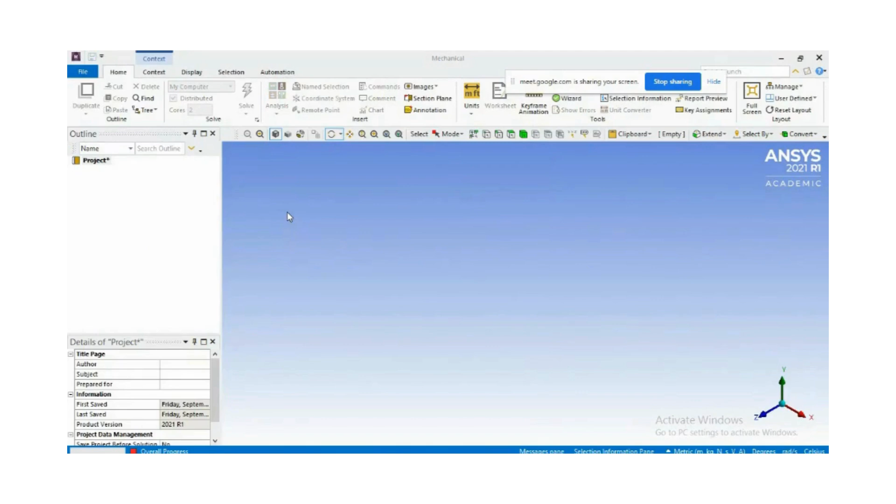Then right click on model, edit. So it will open the DesignModeler, and whatever geometry you have imported, suppose it is in the form of a connecting rod.

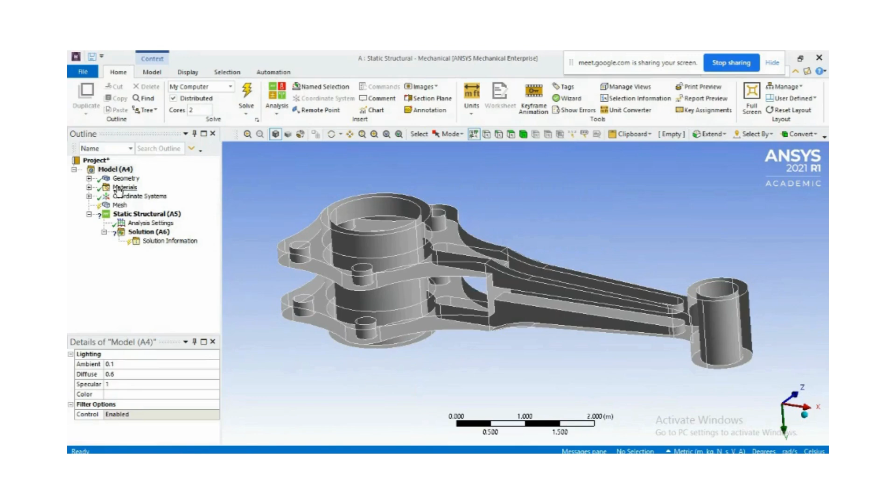We have units here, metric units by default. Suppose you want to change, you can change to centimeter, meter, mm, whatever. Material is structural steel, and you can observe all the properties required for structural steel shown here.

Now meshing is under process, it is incomplete, and for the static structural analysis it is showing a question mark, so it is incomplete. As we move further, we complete each step one by one in this project outline.

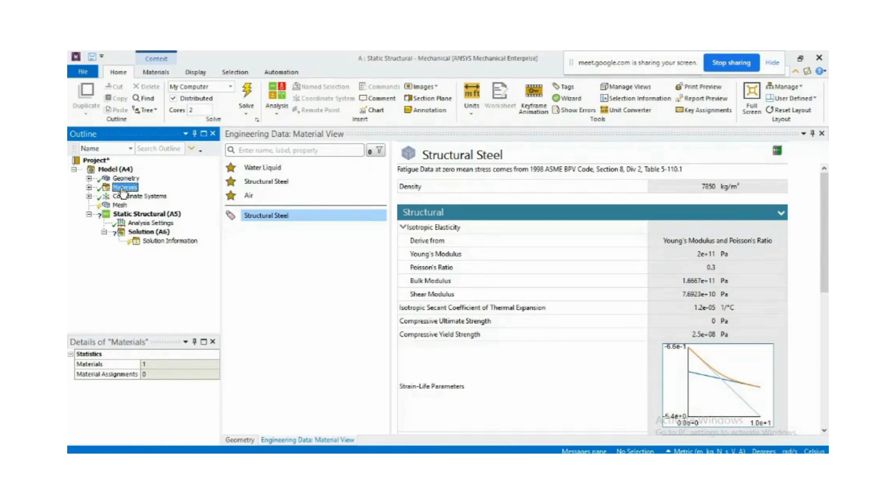Already we have imported the geometry and considered the material. Already here we are considering the coordinate system, x, y, z. That is required to know when you are applying the load, in which direction the force is being applied.

Meshing: you can define the element size based on the dimensions of your component. So I know the component, that's why I am defining 0.15 meter as the element size.

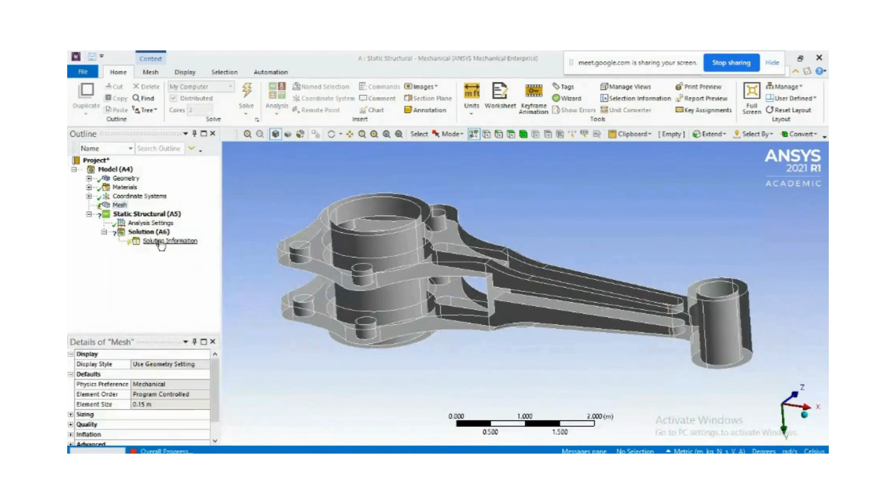Then once you define it, right click on meshing, generate mesh. Once the mesh is generating, it shows completed with a green check mark. Under statistics, you observe the number of nodes and elements created. This is a 3D element which is tetrahedron in nature.

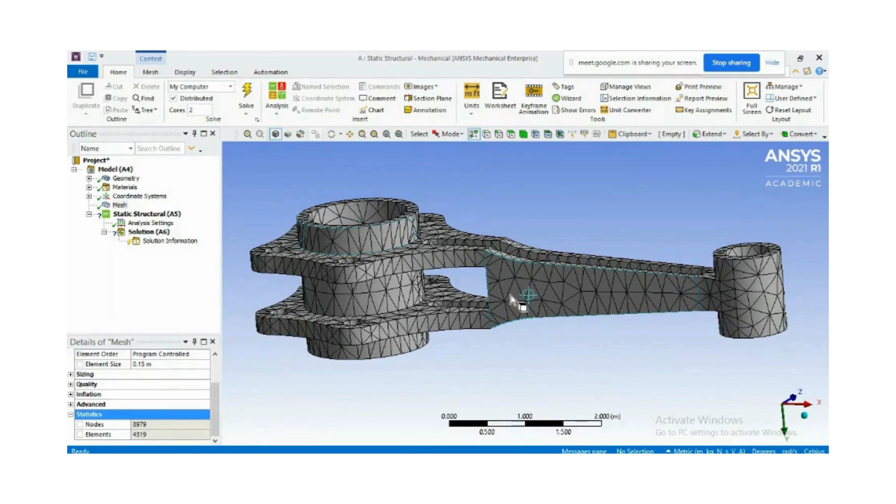In case of a beam with a regular cross section, as we performed, you get a cubic element, or the element is in the form of a brick, similar to a cube. Here all the elements are in the form of tetrahedron. You know the element types: 1D, 2D, 3D. Under 3D, you have tetrahedron as the element type.

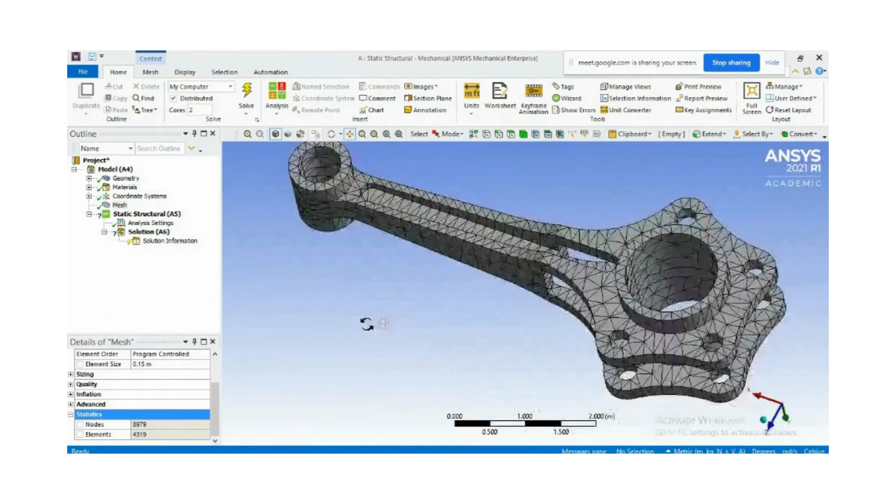Tetrahedron as the element type. It is having 4 corners and 4 faces. That is a tetrahedron.

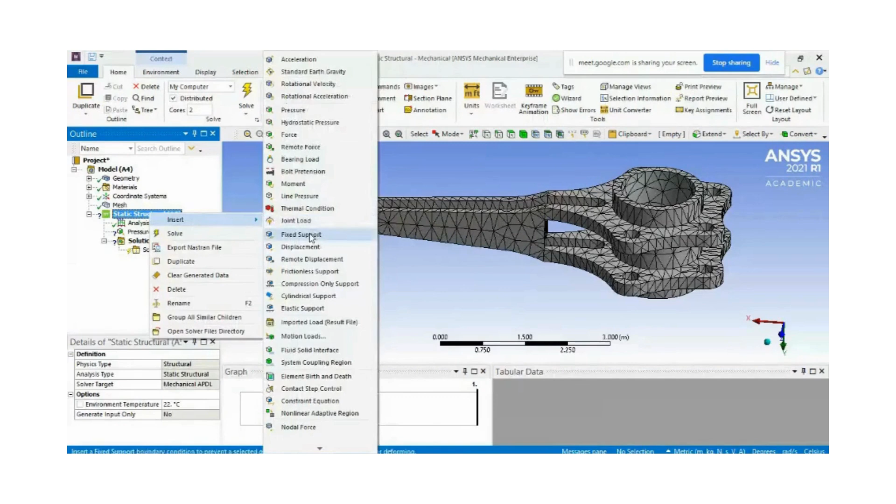Now under the static structural analysis, right click on insert. I require to apply, suppose, pressure, and I also require to constrain the model, so I require fixed support. Then I will apply first pressure on an edge or face, so I will select that face.

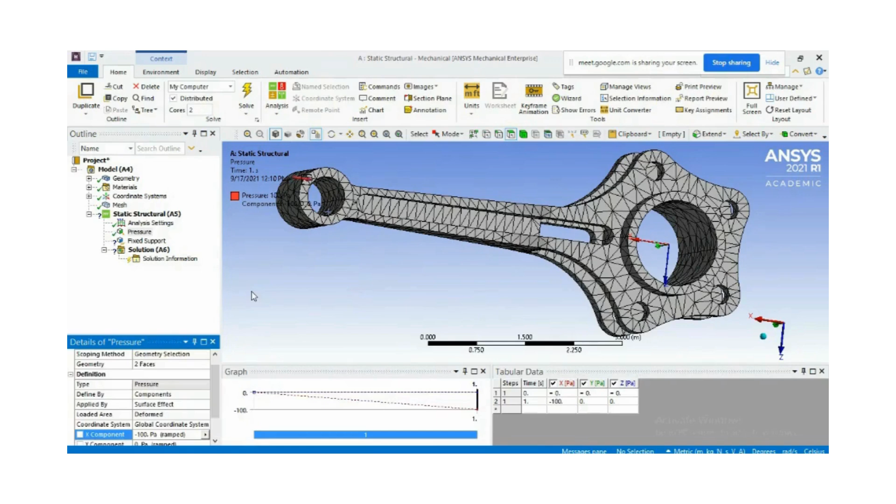Apply, and I will select the magnitude of pressure normal to the face. I will select the component, X component. I will select minus 100 pascal, so that means it is going to act toward the large end. You can observe here, pressure is 100 pascal, its component is minus 100, and we applied it in the X component direction.

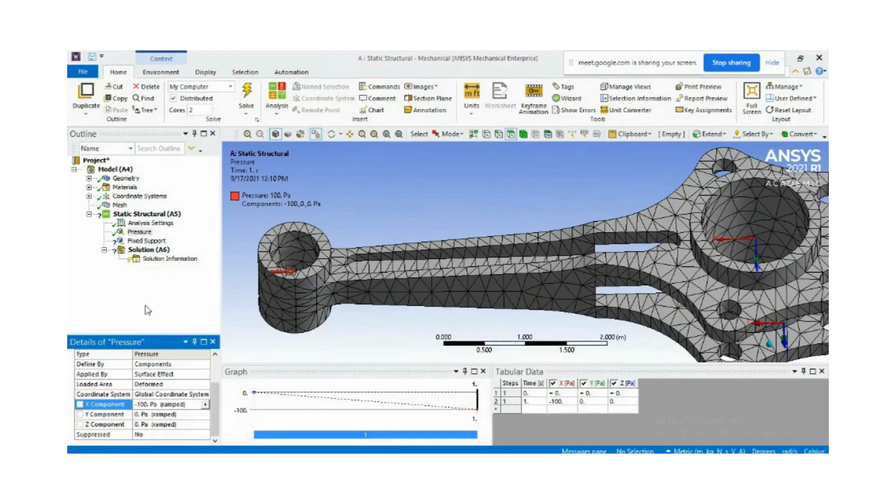Fixed support: now I will constrain somewhere here. I will select the edge for fixed support with the help of control, selecting multiple edges, the lower hole and upper hole.

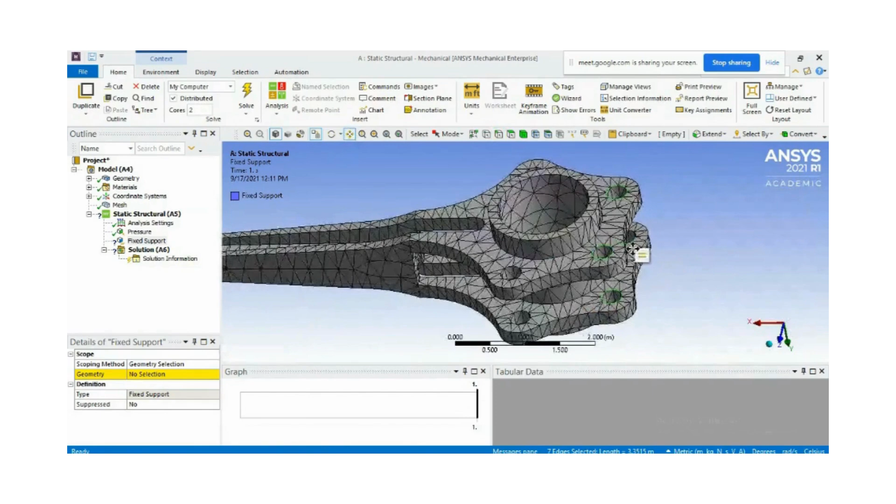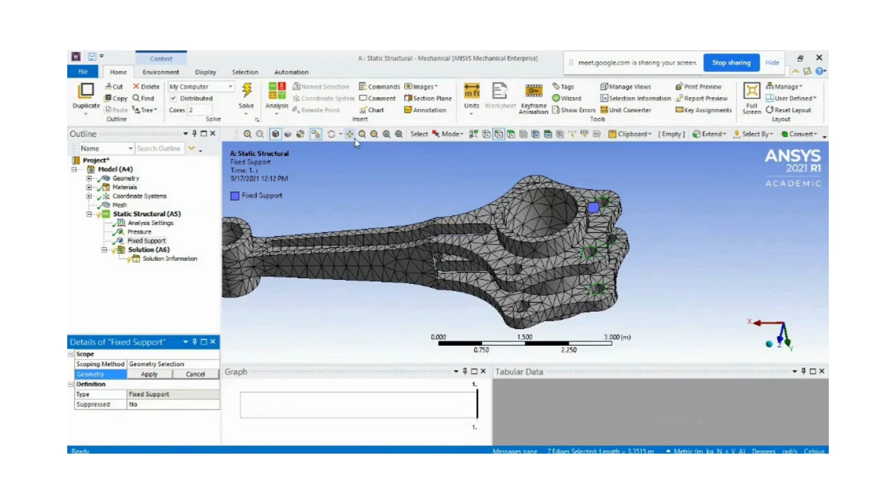Okay, 7 to 8 edges are being selected. You can select one more edge, and again another edge. Now 8 edges are selected.

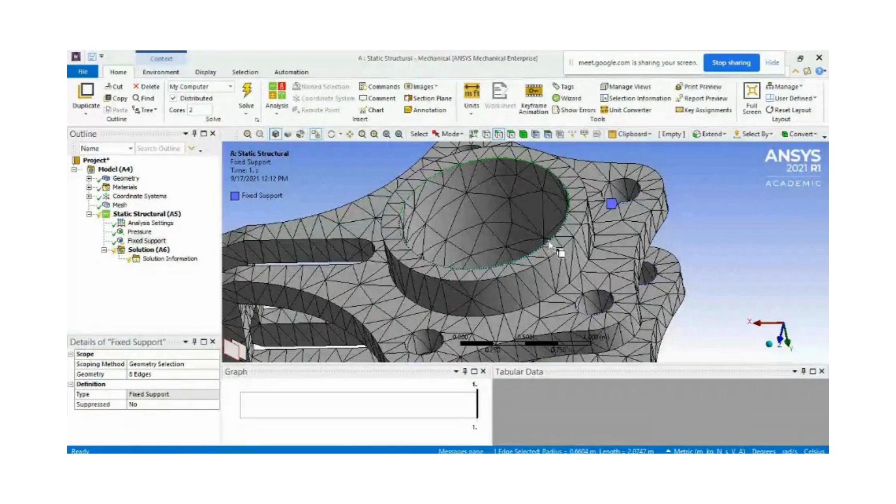I will constrain these holes. You can constrain anywhere, this face also, this face also. For sake of understanding, to apply the boundary condition, we constrained there, since this large end is going to mount on a crankshaft. So fixed support is being applied.

Now for the solution, what is required? You require, suppose, total deformation. Again you require the directional deformation orientation along X.

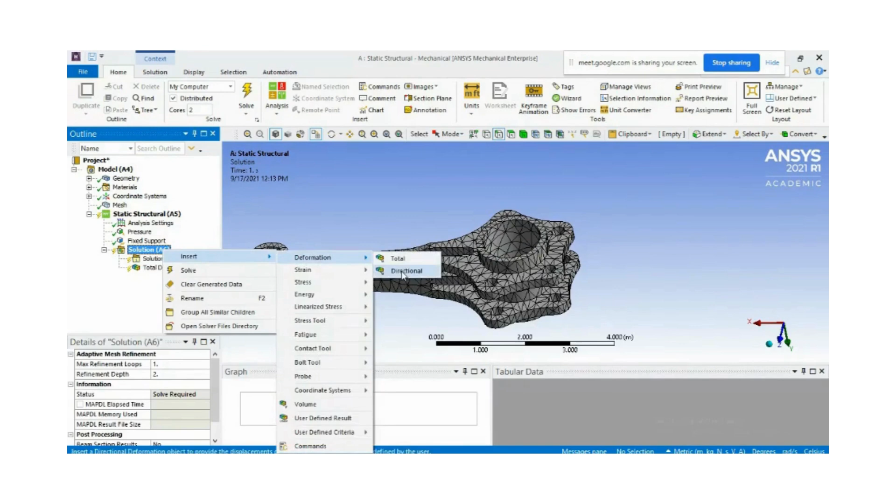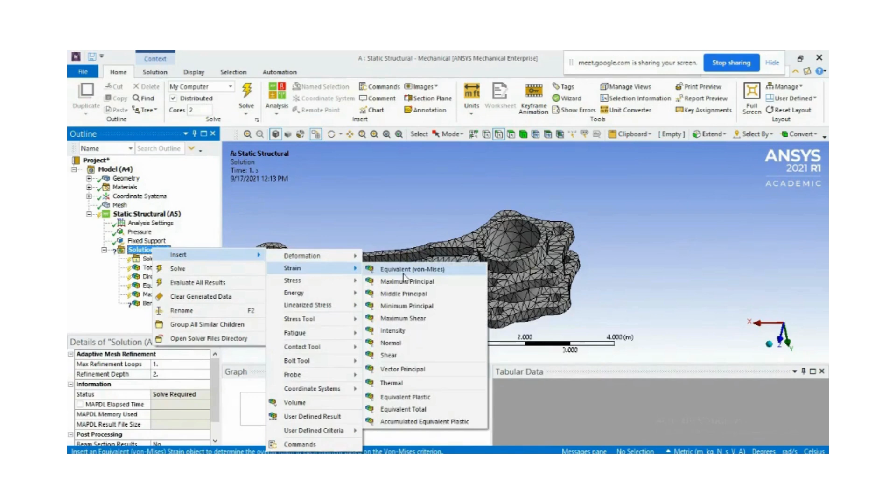I will keep it as it is because the pressure is acting along the x. Then for the solution, suppose stress is required, or principal stress is required, maximum principal. Similarly you require strain, which strain, von Mises or equivalent.

Bending stress. So selection of geometry for bending stress. I will select this as a geometry of a line. This is being selected.

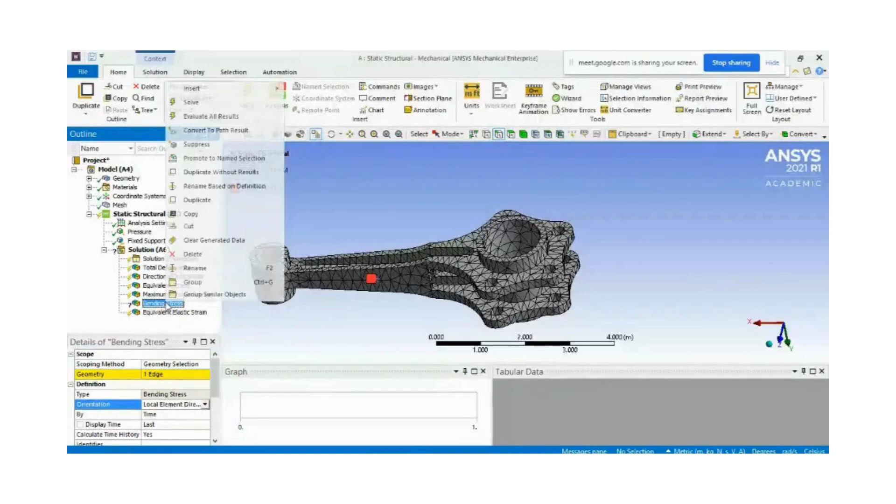It is showing somewhere here, I will delete that. Equivalent strain, and also suppose you require any other types of solution, that is strain energy, the amount of strain energy stored. So these are the results required after the pre-processing.

You have already defined the fixed support and applied the pressure. In modal analysis we only apply the fixed support, we don't apply any force. Instead of force here, you can apply pressure, or force, or moment as well. Just right click, insert. You have acceleration, rotational velocity, application of pressure, hydrostatic pressure, force, remote force, bearing load, bolt pretension, moment, and line pressure.

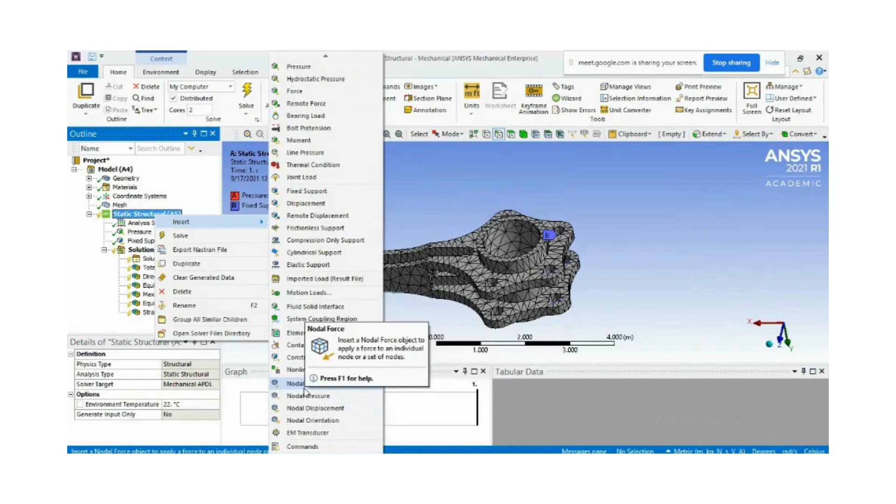You have joint load, motion load, and these constraints. There are n number of options. Nodal displacement you applied, nodal force you applied on node point. So n number of options are there.

Now go to the solution, right click, solve. So now you can observe it is under processing, and once complete it will show the check mark. It is taking some time, you can observe the progress bar.

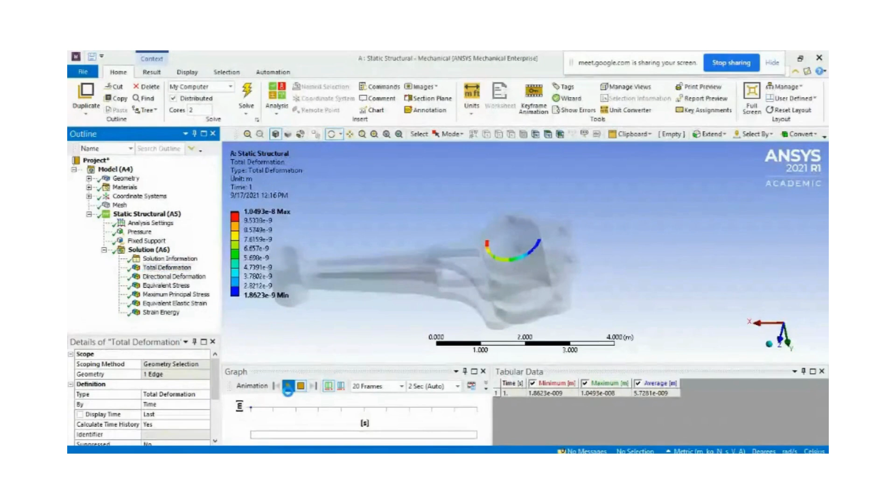Now you can observe it is done, and it is all showing the green check marks. So to view the result, you have to only click on total deformation. It is showing some error, I don't know why, but directional deformation is showing. When the pressure is applied, this connecting rod is going to be exposed to some compressive stresses.

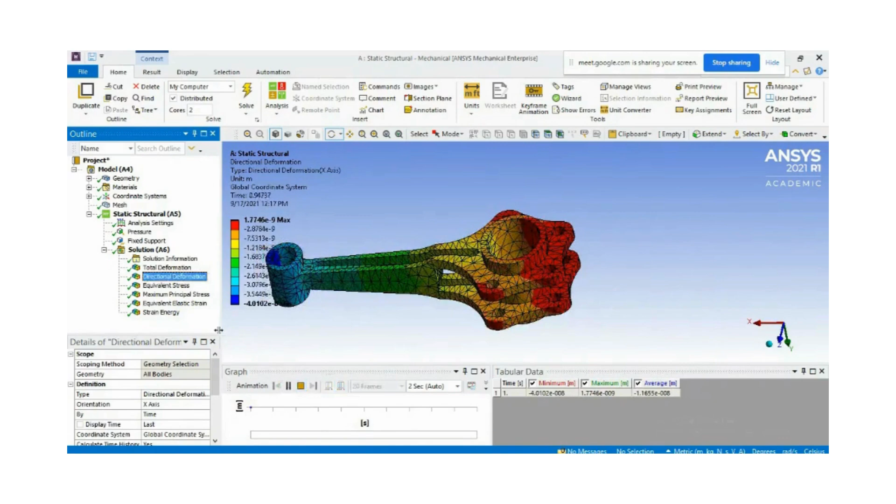Then you can observe equivalent stress, then maximum principal stress, equivalent elastic strain, and strain energy stored. In this way you can observe total deformation, directional deformation, and how you can express that in equivalent stress is also there.

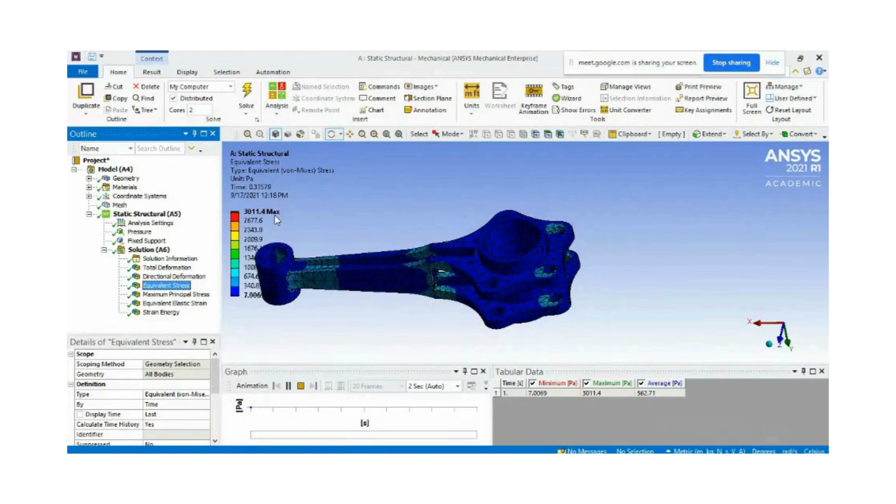So in actual operation, it transmits torque from the piston to the crank, and how that is going to deform, and what is the magnitude of stress induced, that you can simulate. This is very important to know. Now you can observe the equivalent stress, the maximum stress magnitude, approximately 3100 pascal, so it is approximately 3000, meaning 3 kilopascal.

Pascal means Newton per meter square. So you have to go to material and check what is the value of ultimate and yield. The ultimate value and yield value is 2.5 into 10 raised to 8 pascal. So it is within the limit, it is not exceeding this value. Once we exceed this value, it goes to the plastic range.

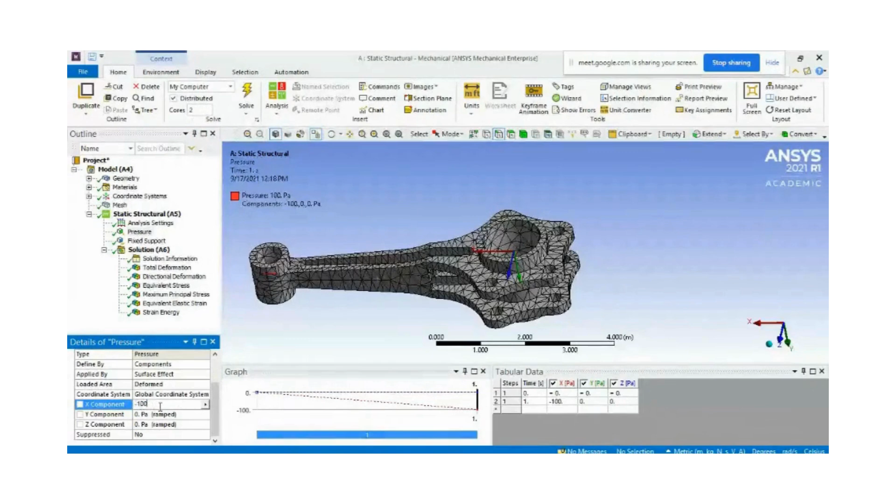And you can observe the magnitude of stress, equivalent maximum stress. So equivalent maximum stress you can observe now, this is now 30,000. So 30 into 10 raised to 3. So it is within the limit of material.

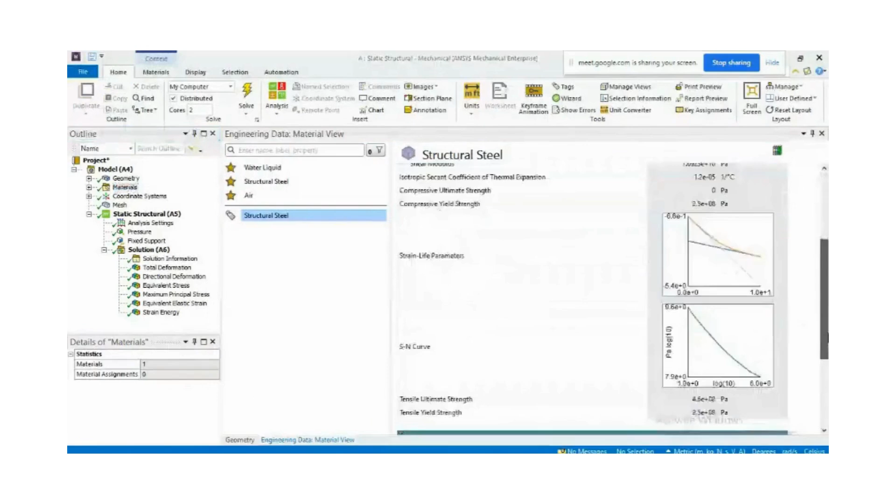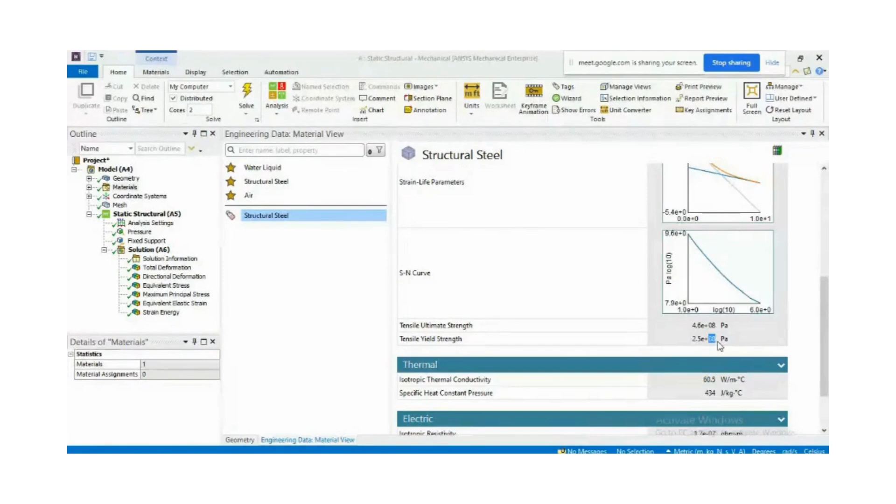So it is 30,000, this is nothing but 2.5 into 10 raised to 8 pascal, or in case of 250 megapascal. So it is within the limit, within the elastic limit or yield limit.

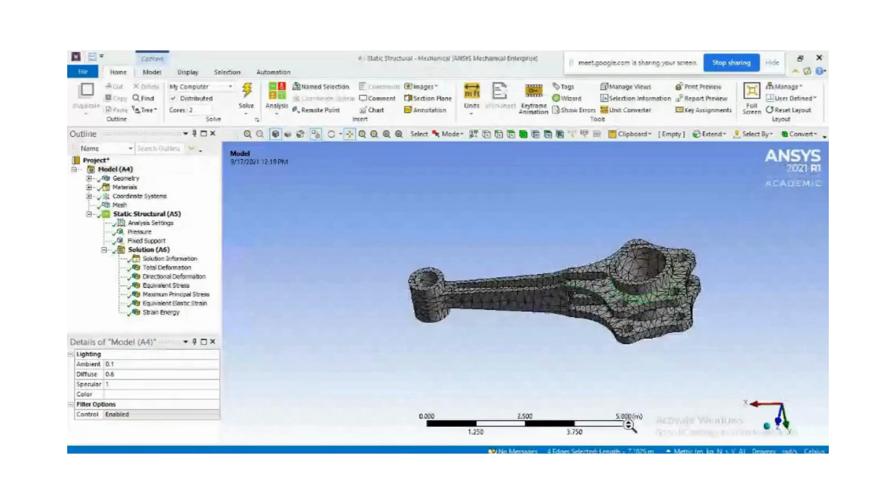So whatever pressure we are exposing or applying on that connecting rod, that is sustained or taken effectively by this connecting rod, because its dimension is very large. The dimension of this connecting rod is very large, around 5 meters or more. This is a very large connecting rod, so it is able to take whatever force is being applied.

So you can observe the other values also. What is the amount of strain energy which is stored? Application of, what is the strain energy, amount of energy stored within the elastic limit. So this is the strain energy, and it is showing over the element.

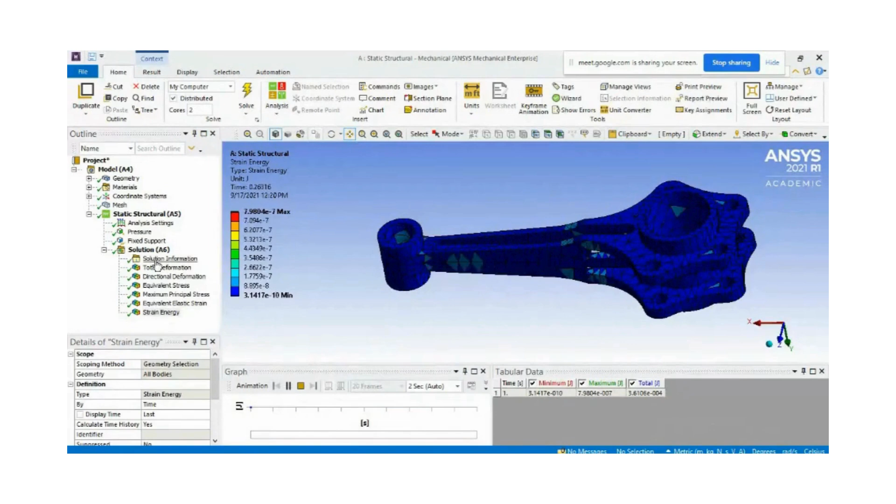So in this way, you can do the, sorry, static structural analysis. In this way, and take whatever input is there, from this you can get what is the deformation, what is the amount of total deformation. So it is e raised to minus 8 meter.

So it is a very small value, micron value, whether you calculate in mm or in meter, it is micron, a very small value. So this deformation can also be taken. You can find the amount of deformation produced by the application of force.